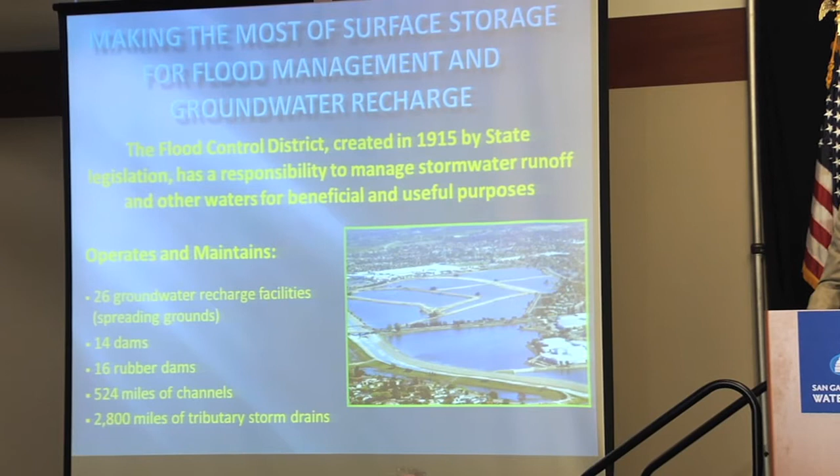One of our missions with the Flood Control District is making the most out of surface storage and flood management and groundwater recharge. As Ken mentioned, there was a very significant storm, at least in our history, in 1914 that created massive flooding and damage throughout LA County. And following that, on June 12, 1915, the LA County Flood Control District was formed. And the reason for it being formed was to deal with these very significant flood hazards that were a potential in the basin at all times.

As you see up there, it was created in 1915 as a flood control agency, but I would rather refer to it as a flood management or stormwater management agency because it's really much greater than flood control. One of our key missions is to also conserve water and provide water to the communities through groundwater recharge. With that, we have probably one of the most extensive flood control systems in the United States.

Part of the facilities that we own and operate for flood control and water conservation are listed here. 26 groundwater recharge basins or spreading grounds, 14 dams that we own and operate. The Corps of Engineers has another 4 dams that they operate in the area for flood control purposes only, and we coordinate our operations with them very carefully. We have 16 rubber dams.

Rubber dams are really diversion structures that are in the river systems that we use to divert water over into adjacent spreading grounds. We have 524 miles of channels that we operate and maintain, and another 2,800 miles of tributary storm drains that are picking up localized runoff, conveying it to the flood control facilities so it can be carried downstream and make sure that everyone's adequately protected.

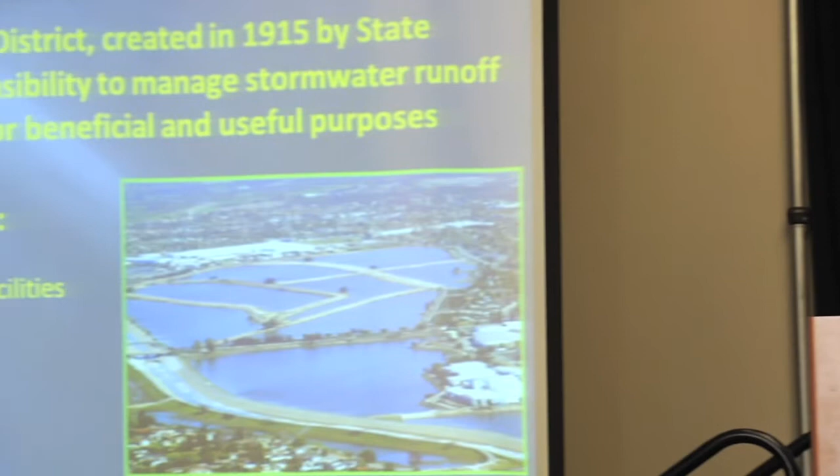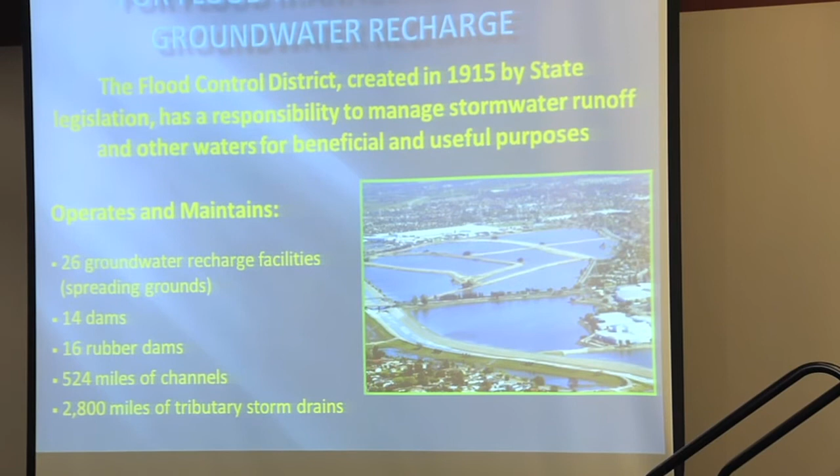In that picture you'll see on the lower part there, that's Rio Hondo drainage canal. And what happens is water's being carried down through the drainage system. There's a gate in this area that's lowered. It blocks the flow coming down the channel, and it diverts it over into the spreading grounds, and we fill up the basins and continue filling them, and we use that for groundwater recharge.

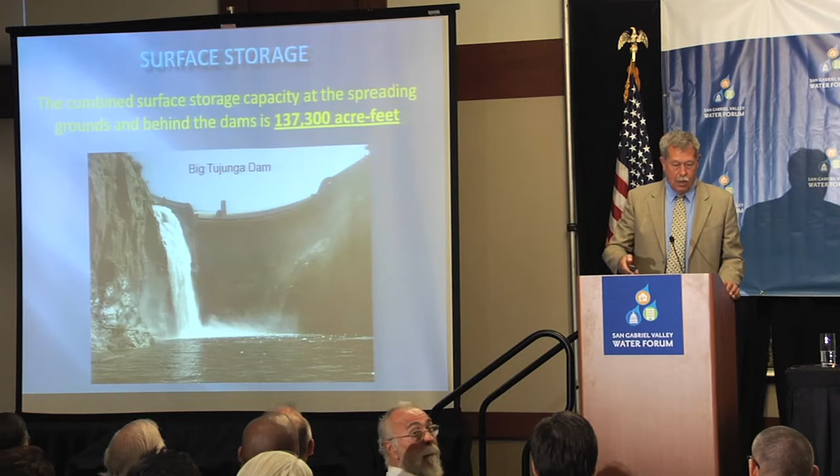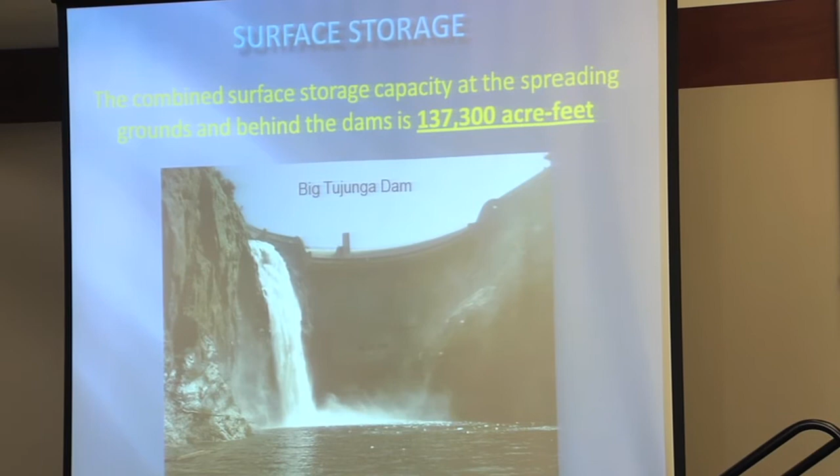As I mentioned, we have 14 dams that we own and operate. This is one of the dams. It's Big Tujunga Dam, which is up in the Los Angeles River watershed. It's a dam that we recently retrofitted for seismic safety. It was completed in 2011. With that, we were able to capture and hold more water behind the reservoir. The State Division of Safety of Dams had a restriction on us because of seismic concerns at that reservoir, so we weren't able to hold a water conservation pool there.

We were able to operate it as flood control only, but we went in on a 3-year project, brought the strength of that dam up, and now we're able to capture and hold another 5,000 acre feet of surface storage at that facility. As you're seeing there, we have about 137,300 acre feet of storage in our spreading grounds and in the dams that we operate. Out of that 137,000, about 110,000 acre feet of that is at the reservoirs themselves.

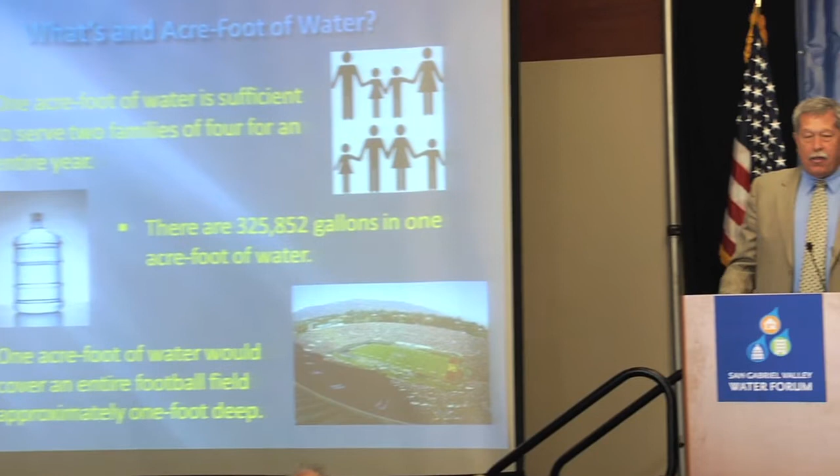Just a quick lesson here. I think a lot of you already know this, but what is an acre foot? An acre foot is basically enough water to supply two families of four for an entire year. There are about 326,000 gallons of water in 1 acre foot. And as another visual, 1 acre foot would cover a football field 1 foot deep. So that gives you some visual perspectives on what's an acre foot.

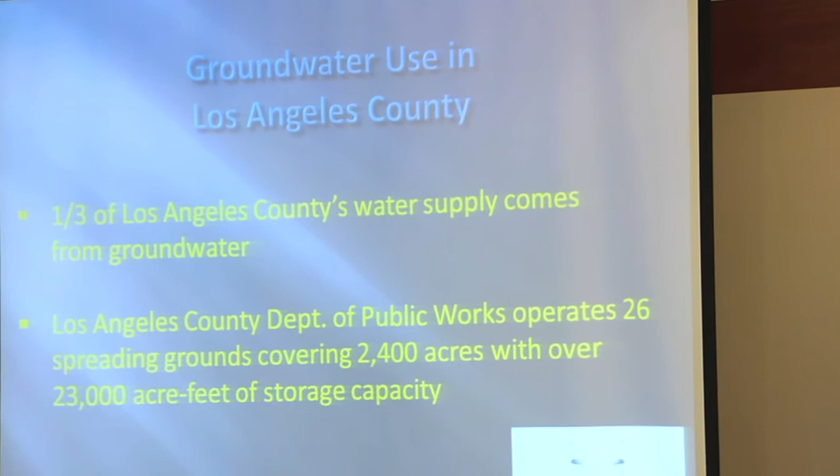Groundwater use in LA County. 1/3 of the Los Angeles County water supply comes from groundwater. So therefore, recharging groundwater aquifers is extremely important. As I mentioned, we operate 26 spreading grounds covering about 2,400 acres of land with a storage capacity of 23,000 acre feet of storage. In addition to that, we operate another spreading grounds for the city of Los Angeles, which is another 207 acres.

How this works is basically we store water at the reservoirs. We operate the reservoirs or the dams for flood control first. Once the flood threat has passed because of a storm event in the area, we quickly go to a water conservation mode, meaning that we start closing down the gates and whatnot to build up a storage pool behind those reservoirs, and release that water at a rate to where we can take it into the spreading grounds down below.

On average, we conserve about 280,000 acre feet of water per year. We've seen some dramatic increases in our capabilities of conserving water over the years through better operations, better maintenance, and also improvement to facilities. We conserve on average enough water to supply 2.2 million people per year. So it's a very significant amount of water that we're recharging.

The water years 2010, 2011 were very productive water years for us. If you look at rainfall, they were just a little more than average rainfall. But with that, we conserved 1 million acre feet of water in those 2 years. You say, well, why can't we do that every year? It really depends on rainfall, not only the amount of rainfall, but how you receive the rainfall. If you get a large rainfall event, all your water comes at once, we have only limited storage capacity, so we're not able to capture it all.

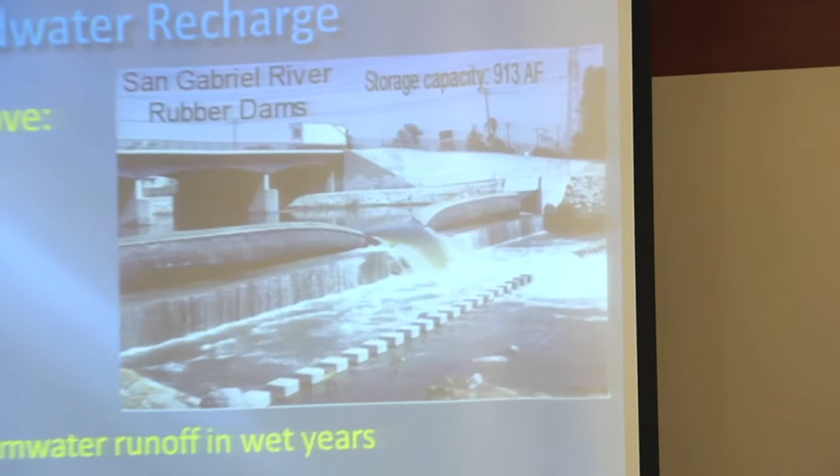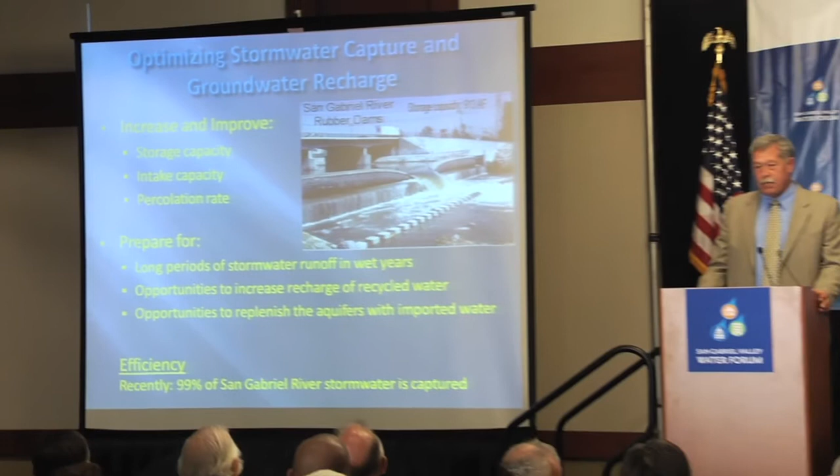So how do we optimize stormwater capture and groundwater recharge? One of the things that we have been working very diligently on is storage capacity. We have storage capacity at our reservoirs. We have storage capacity at our spreading grounds. Most of our spreading grounds projects over the past few years have been enlarging the basins, and that's basically deepening those basins so that we can store more water in them.

Our capacity issues at the reservoirs are primarily driven by sediment management. As you may or may not know, significant fire events really trigger a series of events, and that's primarily sediment runoff or sediment depositing in those reservoirs. So the challenge for us over the next few years, because of the recent fire in 2009, the Station Fire, is to manage the sediment in those reservoirs.

We've seen a significant amount of sediment come into those reservoirs, and as they fill with sediment, as you can see, it affects your ability to capture the stormwater or hold more water in those reservoirs to be released later for groundwater recharge.

One of the other things that we're working very diligently on is intake capacity at the spreading grounds. Right now, some of the restrictions at our spreading grounds is the intake capacity to divert water out of the channels into the spreading grounds. What does that mean? Well, during high flows, if the flow rate is too high, we're not able to put the structures down to block the flow in those river systems and divert it over into the spreading grounds.

But we have several projects underway now where we're increasing our ability to handle more water at the diversion structures so that during higher peak flow rates or higher flow rates down the river systems, we're able to divert that over into the spreading grounds, capture it, and recharge the groundwater basins.

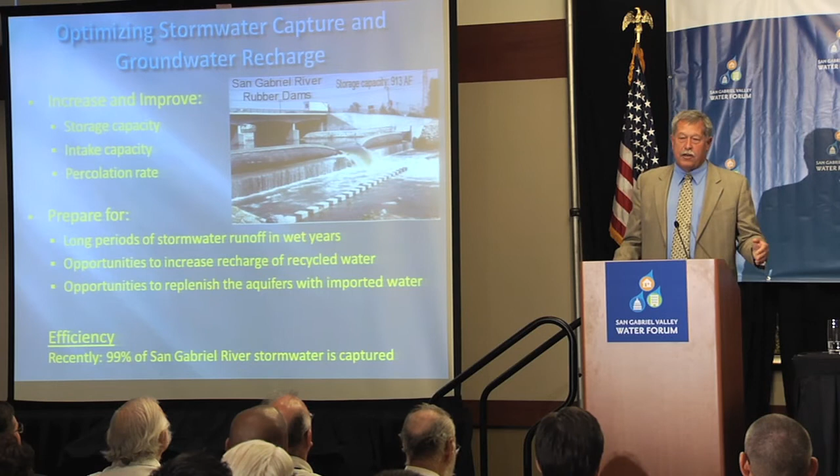Another important factor in groundwater recharge is the percolation rate in the basins. As I mentioned, with the Rio Hondo channel in Rio Hondo spreading grounds, we have a recharge rate of 400 CFS. That's very, very significant. Just to put that in perspective, 1 CFS would be a fully opened fire hydrant. So if you're thinking about 400 CFS sinking into the ground, that's very, very significant.

As you start recharging, the recharge rate starts to drop off because of saturation down below and because of the amount of time it takes for the water to move down through the materials down below, and it will drop off. What do we do to improve percolation rates? There are many things we do, but one of the key components of what we do is we have to go into our spreading grounds and we have to maintain them.

That's maintaining the vegetation that grows there, and that also means we have to remove some of the fine silty sandy material that comes in with the storm flows that tends to settle out on the surface and become a blocking layer. So we go in on an annual basis and scrape off that fine material to restore the percolation rate.

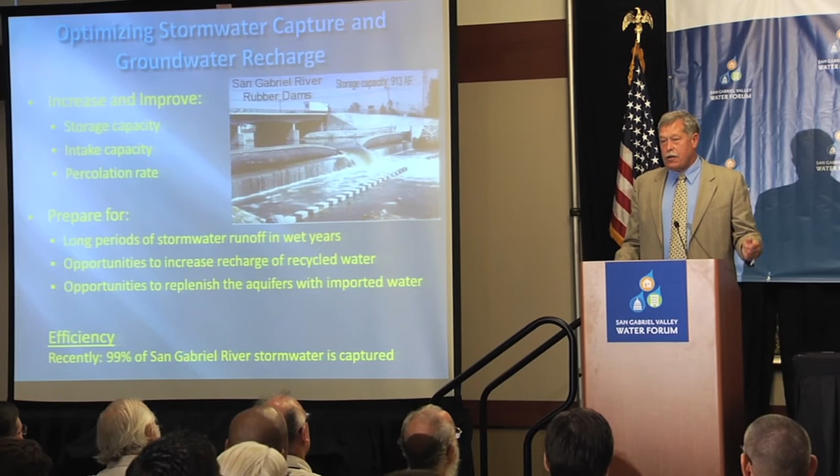How do we prepare for storm season? At all of our reservoirs, we consider storm season to begin October 15th. So by October 15th of every year, all of our reservoirs have been drawn down to what we call minimum pool. We leave a pool in the reservoirs because when you get sediment flows into the reservoirs, you don't want that material moving up to the face of the dam where you have your valves, because then it affects your ability to operate those valves.

So we have what we call a minimum pool elevation, so we never draw them down below that unless we're doing an excavation project. So by October 15th, we've drawn all of our reservoirs down to minimum pool. All the water that was captured in the previous storm season has been sent down to the spreading grounds and recharged.

What we're looking for and have been successful at is looking for opportunities to recharge more recycled water. That has become a bigger part of our operation as we've been able to make partnerships with some of the water agencies, get the recycled water, move it over into our spreading grounds, and recharge the aquifers.

Another thing that we work closely with water master water agencies on is taking imported water that they bring in through pipelines through either the Colorado Aqueduct or through the State Water Project. They bring that untreated water into our flood control facilities. They discharge into the riverine systems. They move downstream. And again, we operate our spreading grounds by putting up the diversion structures and kicking that over into the spreading grounds for groundwater recharge.

One of the statistics I wanted to throw out here, which we've been very, very successful at, is our capabilities of recharging stormwater on the San Gabriel River. We have been very, very effective. Over the last 5 or 6 years, we have captured 99% of the water that's come down the San Gabriel River, meaning that we're able to capture it at the dams, release it at a rate to where we can recharge the facilities down below. So that's very, very significant.